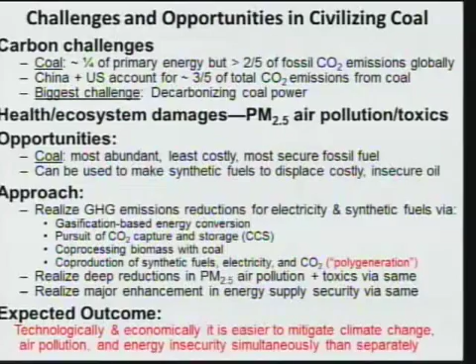And what I'd like to argue here is that technologically and economically, it is easier to mitigate climate change, air pollution, and energy insecurity simultaneously than it is to do these things separately, which seems counterintuitive, but it arises because of a lot of the synergisms in these systems. So I'm going to skip over some of the slides because of what my predecessors have already said here, and I'm going to say something briefly about a couple of the major options that have already been highlighted.

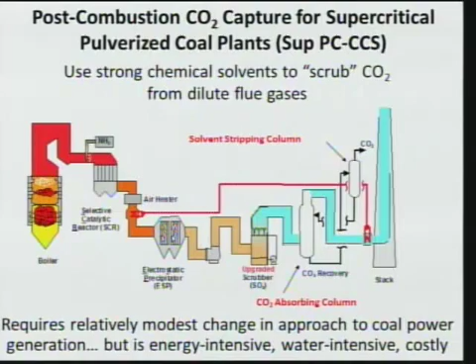One is post-combustion CO2 capture, and I'd like to point out that this is probably the simplest way forward for doing carbon capture and storage for coal-fired power generation, in that it's the least disruptive approach from the status quo, but it's very energy intensive, very water intensive, and very costly.

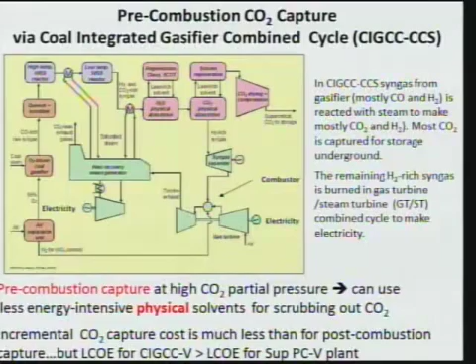My predecessors have also talked about gasification-based strategies, and in particular, coal IGCC technology. This has the big advantage over post-combustion capture in that it involves pre-combustion capture that requires much less energy penalty than is required with post-combustion capture. But one of the fundamental problems that has challenged IGCC technology is that if you're not going to do CCS, the power plants that just vent CO2 are less economically efficient than conventional pulverized coal power plants.

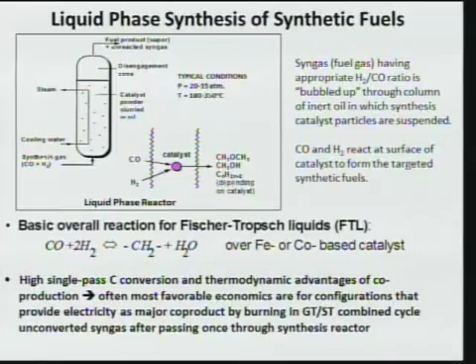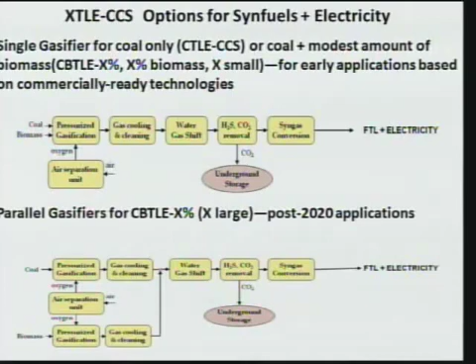So I'm going to be focusing here on co-production of synthetic liquid fuels, and for specificity, I'm going to be talking about Fischer-Tropsch liquids with once-through system configurations, where you pass the synthesis gas from the gasifier through the synthesis reactor, and you use the unconverted synthesis gas to make electricity in a gas turbine, steam turbine combined cycle. And this is just a configuration of what these systems look like, and typically in these systems, about 2/3 of the energy output is in the form of liquid fuels and 1/3 is in the form of electricity. And I'm going to be talking about coal-only systems and coal plus biomass systems.

And for the coal plus biomass systems, I'm going to distinguish between two different cases. One is what you can do during this decade with modest amounts of biomass as a feedstock, less than 10%, say. And if you're going to use less than 10% biomass, you probably are going to choose to gasify the biomass and the coal in a single gasifier. But if this technology is successfully launched in the market, it's very likely that in the longer term, post-2020, we would not be doing it that way. We would be having separate gasifiers for coal and biomass.

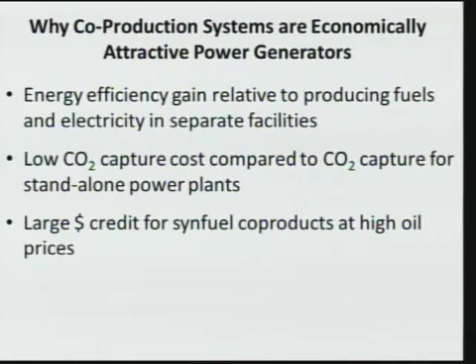So why does one want to think about co-production systems as power generators? And that's what I'm going to focus on here, looking at these co-production systems as power generators. First of all, there's a major energy efficiency gain relative to producing fuels and electricity in separate facilities. And then second, a very important aspect of these systems is that the cost of CO2 capture is much less for these co-production systems than it is for standalone power plants.

And the reason for that is whenever you make liquid fuels, synthetic liquid fuels from coal-derived syngas, you have to remove the CO2 that's generated upstream of synthesis before it is put into the synthesis reactor, whether you're worried about the climate problem or not. And so it's very cheap to just capture that CO2 and compress it and put it underground somewhere.

And the third thing that is really important is that these systems just shine incredibly in the world of high oil prices, because you get a large credit for the sale of the liquid fuel co-products, which drives down the generation cost assigned to electricity. So why do you want to co-process biomass?

In these systems, and the ones that I'm going to highlight here, about 65% of the carbon in the feedstock is put underground. About 25% ends up in the synthetic liquid fuels. And when you put CO2 underground that is derived from biomass, that is negative greenhouse gas emissions, because all the CO2 from the biomass was extracted from the atmosphere during photosynthesis. And those negative emissions can be used to offset the positive emissions from the coal-derived synfuels and also the positive emissions from coal-derived carbon at the conversion plant.

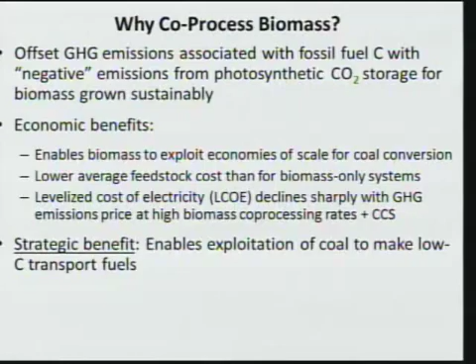And the economic benefits are that this enables you to exploit the economies of scale for coal energy conversion, and a lower average feedstock cost compared to biomass-only systems, because biomass is typically much more expensive delivered to the plant than coal is. And also the levelized cost of electricity declines sharply with greenhouse gas emission price at high biomass co-processing rates. And a very important strategic benefit of this is it enables the exploitation of coal to make

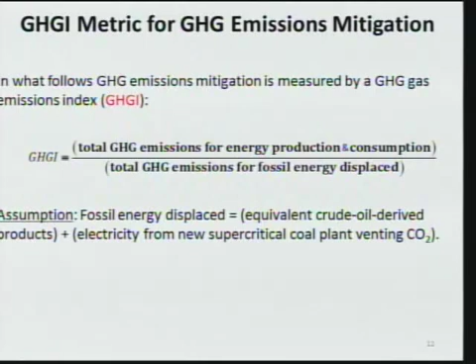low-carbon transportation fuels. And an important metric that I'm going to introduce here is what I call the greenhouse gas emissions index, which I define as the total greenhouse gas emissions for production and consumption for the system that I'm describing, divided by the total greenhouse gas emissions for production and consumption of the fossil energy displaced. And for the purposes of this analysis, I'm going to assume that the fossil energy displaced is the equivalent crude oil-derived products and electricity from a new supercritical coal-fired power plant that vents CO2.

And these are the 8 systems that I'm going to focus on. The top 2 are a pulverized coal plant that vents CO2, one with CCS, with post-combustion capture, an IGCC plant with pre-combustion capture, and then 4 co-production systems. CTLE means coal to liquids and electricity. CBTLE means coal and biomass to liquids and electricity, and the percentages there are the percentages of biomass that you're including in the system. So I'm going to look at something for this decade, which is 5% biomass, and then one for the longer term, which is 29% biomass.

And notice that if you have one of these co-production systems that is based only on coal with CCS, you get a 30% reduction in the greenhouse gas emissions. In other words, a GHGI of 0.7. If you have 5% biomass, the greenhouse gas emissions index is 0.5, and if you have 29% biomass, it's less than 0.1. In other words, more than a 90% reduction in emissions. I'm also going to make a comparison to nuclear plants in this, and I should point out that all of my analysis is not for first-of-a-kind plants, it's for nth plants, and these are for U.S. conditions, and we have not yet worked out the economics for Chinese conditions. We hope to be doing that during the course of the next year.

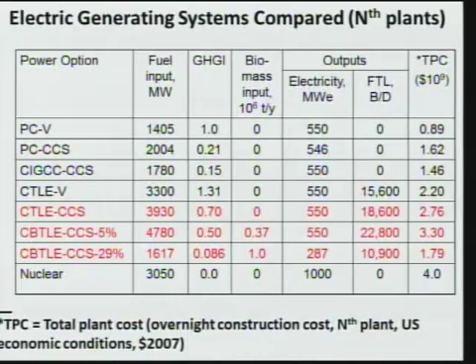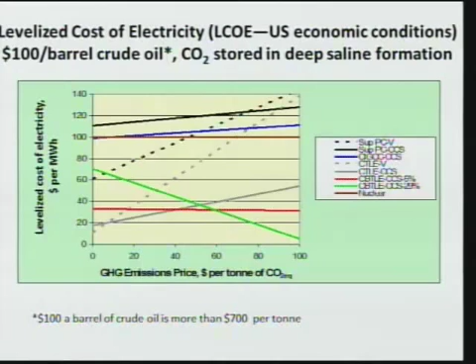And in fact, if you look at that crossover point with the blue line, it represents an increase of 70% in the levelized cost of electricity compared to an existing coal plant that vents CO2 at zero carbon price. So those are very big penalties. But look how much lower the costs are for the co-production systems, even at very modest greenhouse gas emission prices.

And in fact, at zero carbon price, both the coal only and the 5% biomass plant provide much cheaper electricity than does the pulverized coal plant that vents CO2. And why does this happen? Because this is evaluated here at the current oil price, which is about $100 a barrel. So you get this enormous benefit from those co-products.

And for those of you who aren't used to thinking about dollars per barrel, this $100 a barrel corresponds to more than $700 a ton of oil, which is, I think, the units that our Chinese colleagues are much more familiar with. But if you deploy a lot of these plants, the world oil price is not likely to stay up at $100 a barrel. It's going to go down, okay?

And so a very important metric that you want to think about here is what is the break-even crude oil price? The lower the better, okay? The break-even crude oil price is the price at which the synthetic fuels would be competitive with the crude oil products being displaced.

And I want to call your attention to the fact that the green line there, now remember that represents a system with more than 90% reduction in greenhouse gas emissions, crosses the least cost line, that's the gray line there, which is coal only, at about $55 a ton of CO2, which is the minimum market price for IGCC coming into the market with CCS systems. And at that price, the break-even crude oil price is not $100 a barrel, it's $60 a barrel, okay?

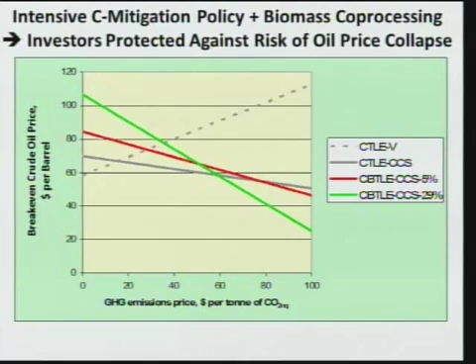And if you push this further to carbon prices that would enable post-combustion to come into the market, you can see that you can drive the prices down to even lower than that. And if you think about decarbonizing natural gas combined cycles, they require a carbon price more than $90 a ton, okay? And at $90 a ton, you can see the break-even crude oil price is $30 a barrel. We're not going to go back to $30 a barrel in the future, regardless of how much of this we put in the system.

So the message of this is that a good way to protect against the risk of oil price collapse is to have a very strong carbon mitigation policy combined with a high rate of biomass co-processing. They give you a high degree of protection against the risk of oil price collapse. But how are we going to get started? We don't have a carbon mitigation policy at the present time, so what can we do?

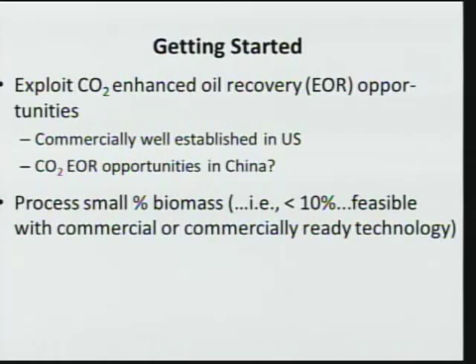And our thinking at the present time is that you want to do two things if you want to move this technology forward. First of all, initially exploit the opportunities for enhanced oil recovery that my colleagues have already mentioned here. This is a very well-established technology in the United States, and I think that there are probably significant opportunities in China, but they're much more uncertain than the opportunities in the United States. And of course, as I've already indicated, we want to process just a small amount of biomass for these first plants. And I'm going to point out that in the United States, I'm not going to go through all the numbers on this

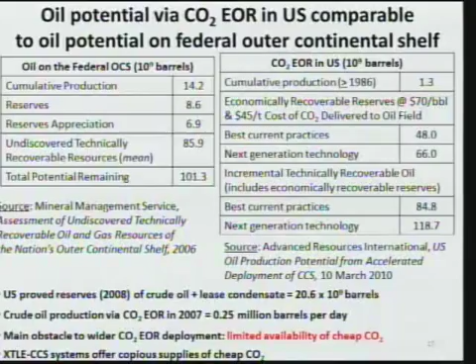slide, but I just want to point out that the CO2 EOR resource, the technical resource, is probably comparable to what we can get from new oil on the outer continental shelf in the United States. Okay, and this is much easier in many ways to exploit than new oil on the outer continental shelf, and much less controversial.

And I want to point out that these systems have a very attractive approach to CO2 EOR. And that is, you don't have to be nearby in order to exploit the CO2 EOR opportunities. And that's because the costs of CO2 capture are extremely low for these plants. And I'm considering these plants with 5% biomass with a selling price of CO2 at the plant gate that brings the levelized cost of electricity down to the level of a coal-only plant that vents CO2. Okay, and that turns out to be an extraordinarily low $6 a ton for these plants.

And what I've suggested here is you might have a cluster of these plants that are remote, a long distance away from a CO2 EOR site. And I suggested that say 5 of these plants combine their CO2 streams into a long trunk line that would carry almost 40 million tons a year of CO2 to a distant CO2 EOR site.

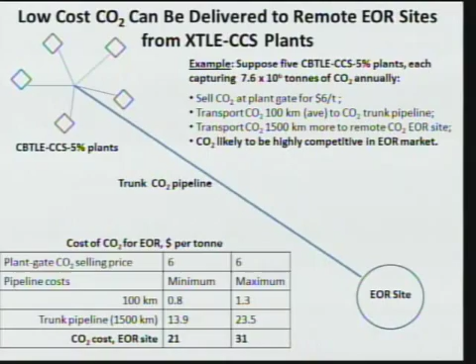And you can see that I've shown the calculation here, what the cost of delivered CO2 would be. It would be like $20 to $30 a ton, which is less than the market price for CO2 EOR in the United States. Okay, and this graph here shows what those levelized costs again.

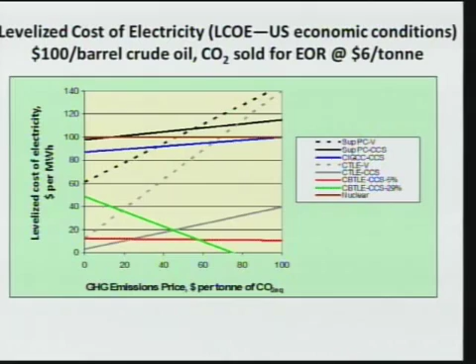If all the systems in here sell CO2 at the plant gate for $6 a ton, you can see that all of the co-production systems in this case, even the 29% biomass case, are less costly than a coal plant that vents CO2 at $0 a ton carbon price. So you don't need a carbon price to get started with this. You don't need nearby CO2 EOR opportunities to get started with this, but you do need a pipeline infrastructure, and you got to build that, okay?

So now I'm going to ask the question, is China likely to be an early mover with CCS technologies? First, I want to point out that despite the attractive economics and environmental benefits of these systems, they face formidable institutional obstacles. First of all, the technologies require managing 3 products simultaneously that serve radically different commodity markets. Those are liquid fuels, electricity, and CO2. And you have to ask this question, who's going to own and operate these plants?

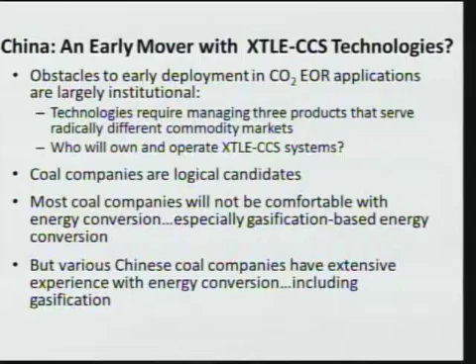It's not a comfortable fit for having coal companies or power companies and oil companies in joint ventures with one another because they're culturally very different. Coal companies are logical candidates, but most coal companies in the world will not be comfortable with energy conversion technology, especially gasification-based energy conversion technology, but that's not true in China. And the reason for that is that various coal companies in China have extensive experience with energy conversion, including gasification.

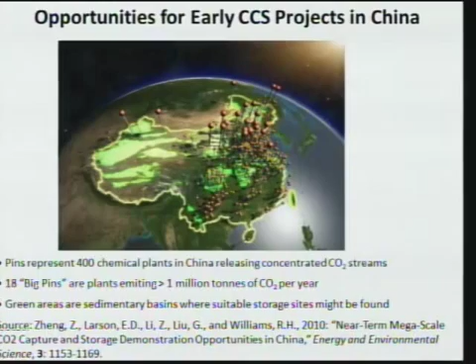And this is a map from a paper that also came out of our Tsinghua collaboration showing early CCS opportunities in China. And each of those 400 pins represents chemical plants that involve coal gasification in China. These are plants that are either existing, under construction, or on order. Okay, and we identified on the order of 20 of these plants that co-process more than 1 million tons a year that would be near prospective CO2 storage projects and very good potential candidates for some of these early action activities.

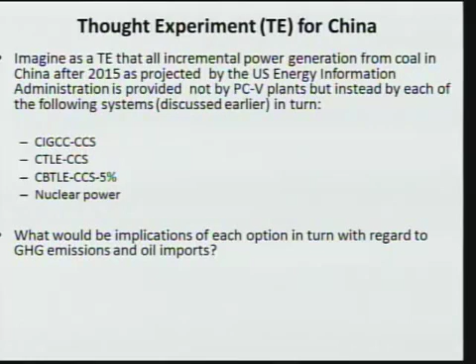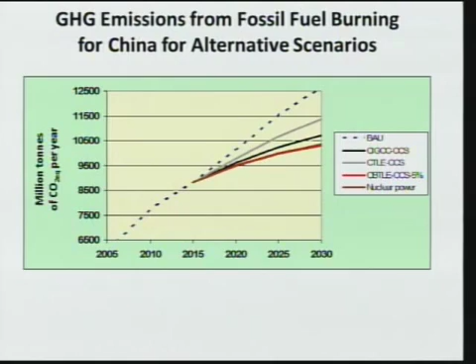And these are the results on greenhouse gas emissions in the period to 2030. And you can see here that relative to business as usual, the two lowest curves that represent both the CBTLE with CCS and 5% biomass, and nuclear power, reduce greenhouse gas emissions by about 2.3 billion tons per year. Okay, that's a very surprising result since the GHGI value of nuclear is 0 and the GHGI value of the 5% biomass is 0.5. But you've got two products with the CBTLE plant, and you're decarbonizing each of them by 50%, and they're about the same emissions reduction. So you get the same emissions reduction as you would with nuclear power.

But if you did that with nuclear power, the amount of extra nuclear power China would have to build between now and 2030 is comparable to the total world nuclear power capacity at the present time. As far as oil imports are concerned, they would essentially vanish for both of these co-production options. And so, in fact, with the 5% biomass case, you would actually become a mild exporter in this period. So I'm going to suggest that a U.S.-China collaboration to launch these technologies in the market might be of great interest. And the collaboration might be based on first-of-a-kind commercial-scale demonstration projects in EOR applications.

There should be perhaps a demonstration project in each country that would go along with collaboration on ancillary R&D and a collaboration on overcoming the formidable institutional obstacles to these plants. And to this collaboration, the U.S. would bring extensive CO2 EOR experience and some experience with IGCC technology. China would bring extensive experience with chemicals manufacturing via gasification and some experience with gasification-based synfuels production. This collaboration would help establish the robustness of these technologies in the market and bring the plant performance and cost information into the public domain so that the technology can be readily scoped and financed by a variety of industrial players. Thank you.